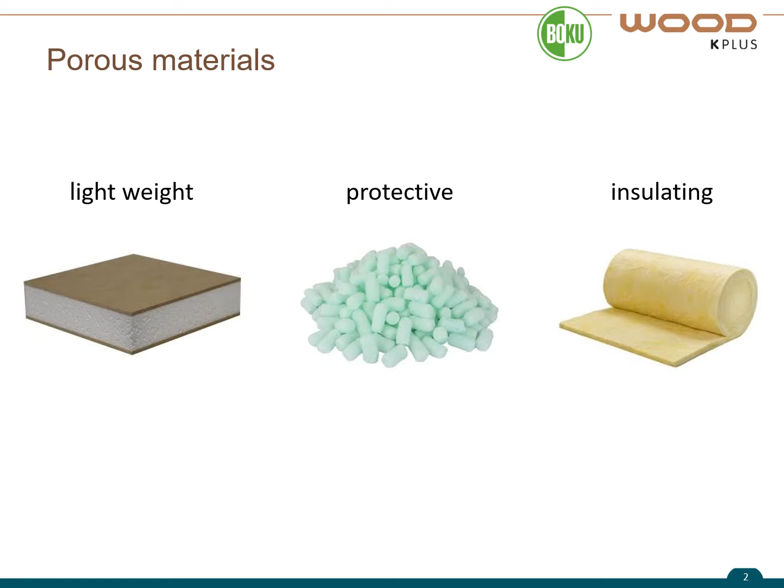Porous materials are widely used for different applications where different material criteria are needed. They perform as core layers, for example, in lightweight materials for mechanical purposes, but their lightweight is also of interest for packaging when it comes to protect valuable goods during transportation. However, not only their low weight, but also their low thermal conductivity is of significant value. That is why most insulating materials are of a porous structure.

Besides lightweight and thermal insulation properties, a good fire resistance and moisture resistance are of advantage. Inorganic materials, like for example different silicates formed to a porous structure, exhibit such preferred material properties, but their production is quite energy consuming. A bio-based hybrid that exhibits inorganic properties would be straightforward.

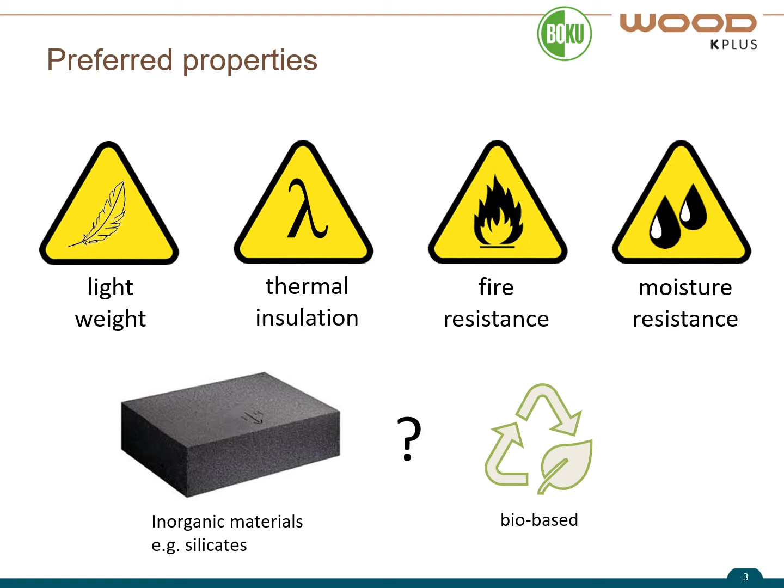As an interesting raw material, we defined wheat bran, which is a side product of the wheat production, arising in enormous amounts and appears in flake-like structure. Wheat bran is the outer shell of corn and is full of different nutrition that are mostly used for horse fodder nowadays. The second material that we were using for our investigation is wood sawdust, which is arising in enormous amounts in wood panel industry. Nowadays, most of this material is used for fuel and is burned.

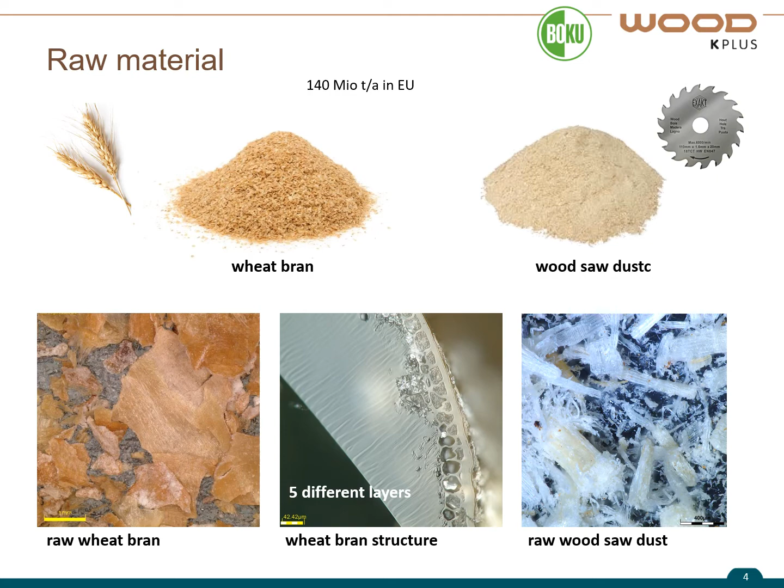As both raw materials are quite heterogeneous in their raw condition, we decided to use different disintegration techniques for homogenization. Therefore, we used a dry and a wet disintegration process in parallel. Here we used an ultra-centrifugal mill for the dry process and the ultra-fine friction grinder for the wet process.

After the disintegration, the aim was to produce a porous structure by means of mechanical foaming with a certain amount of organic and inorganic material. We started with different organic binder systems as for example PVAc, urea-formaldehyde and starch glue, but also different inorganic silicates in combination with surfactants like Tween and sodium lauryl sulfate to create foams.

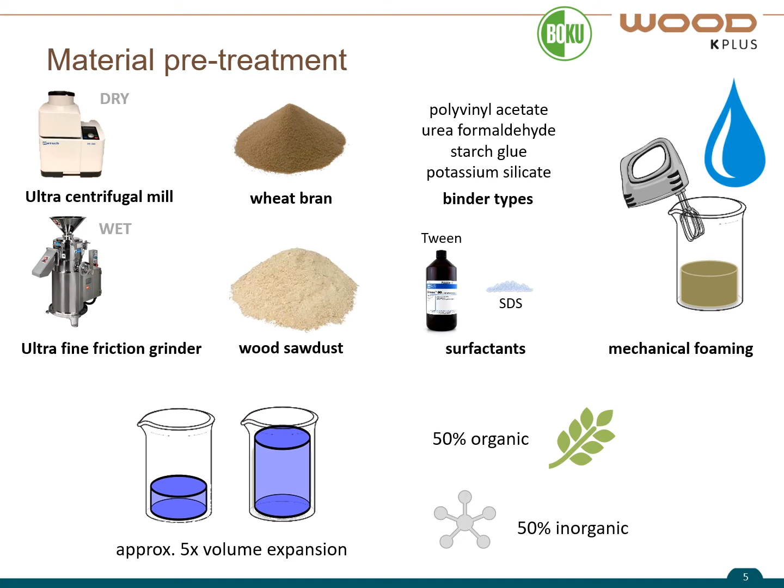In the beginning, we were not able to create stable foam with a significant amount of inorganic binder, as the moisture content of the organic material involved turned out to be crucial. However, in the end we achieved a 5 times volume expansion with 50% organic particles and 50% inorganic binder material and were able to dry the foam to a stable porous structure.

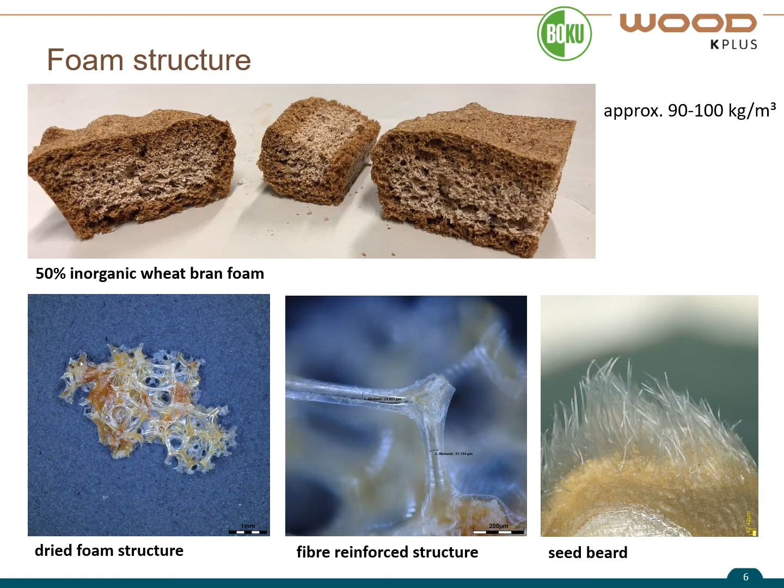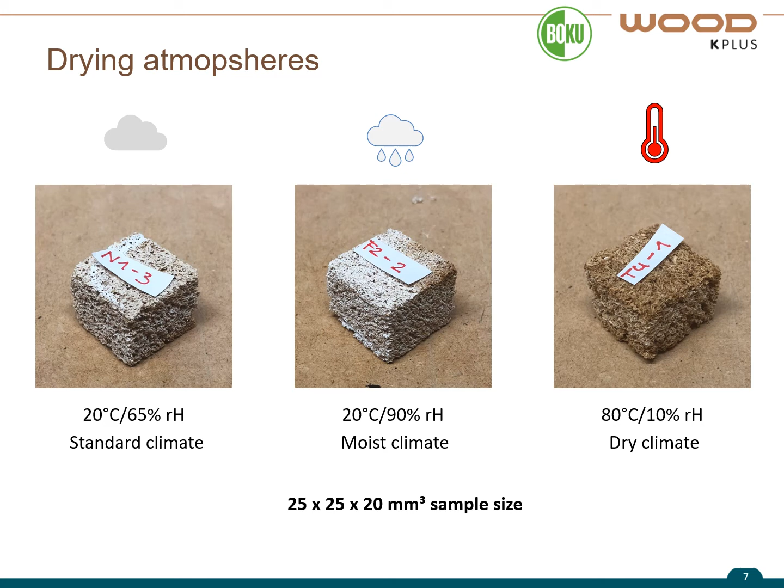As the wet foam contains up to 60% water, the drying is a crucial step. Therefore, 3 different drying atmospheres, namely a standard climate, a moist climate and a dry climate, were established to see their influence on the porous structure's properties. Finally, we were able to cut out samples for further investigation.

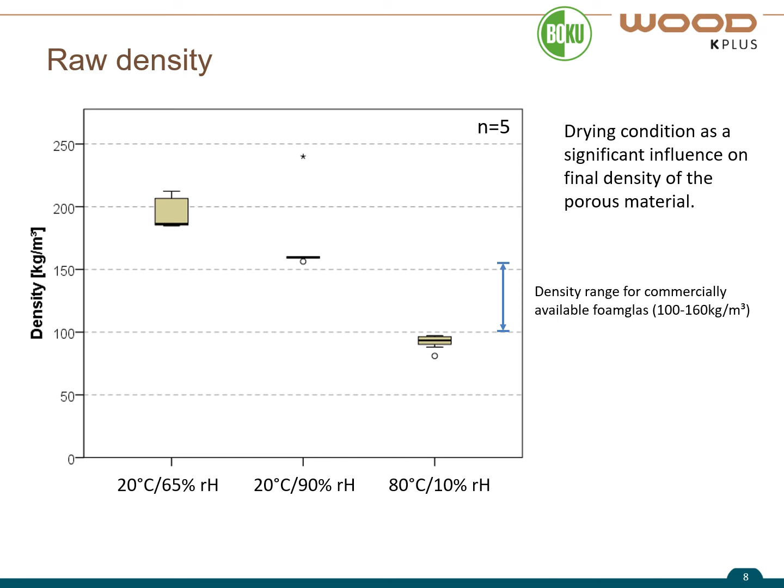On this slide you see the raw density we achieved with the different drying atmospheres. Interestingly, the high moisture content resulted in a slightly lower density than the standard climate on the left side. The lowest density was reached with the higher temperatures. On the right side you see an indicator for the density range for commercially available inorganic foam glass.

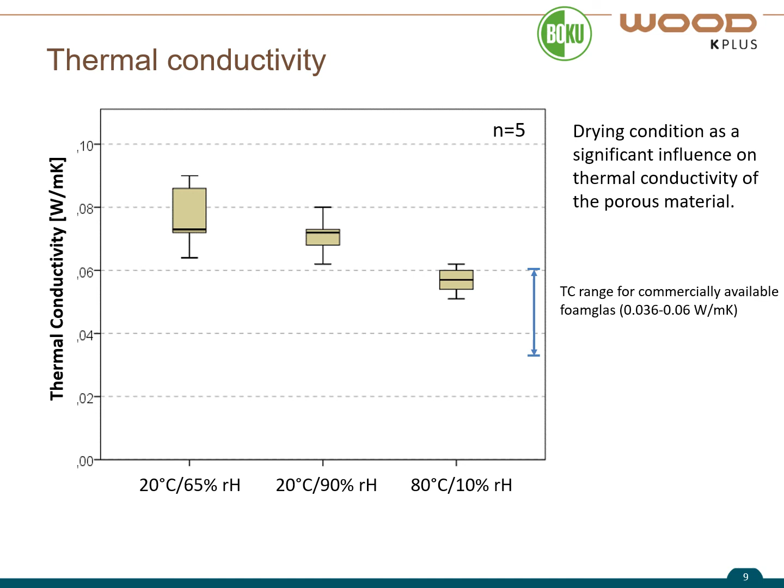On this slide we see the thermal conductivity values in watts per meter Kelvin of the samples dried at the different climates. Here, the 2 samples dried with lower temperatures show no significant differences with values around 0.07 watts per meter Kelvin. Only the higher drying temperature achieved a lower thermal conductivity of below 0.06 watts per meter Kelvin and is therefore within the range of commercially available foam glass.

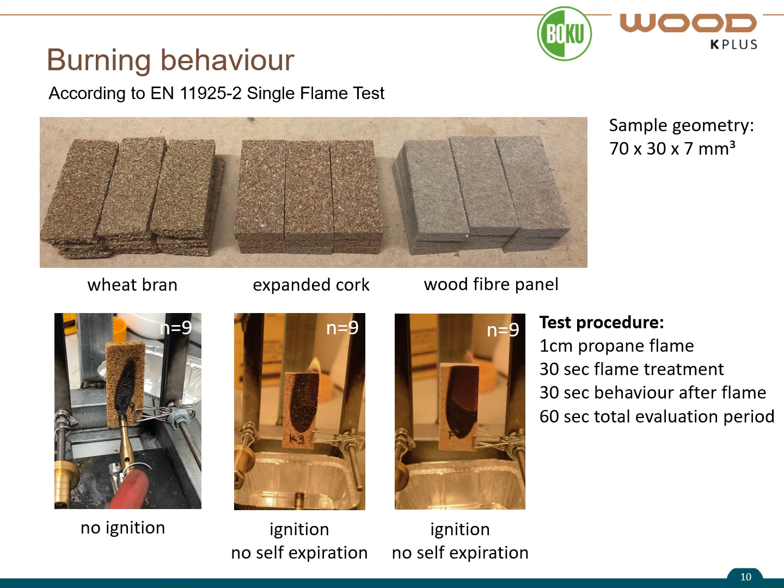Further, we conducted a single flame test where flame is held to the sample surface and the burning behavior is observed after the flame is removed. As reference material, we took cork and a wood fiber panel, both with a density of approximately 260 kg per cubic meter. What you can see is that our wheat bran sample did not burn after 30 seconds, where both of the other materials ignited and burned after the flame was removed.

To conclude, we can say that we successfully produced a porous material based on wheat bran, wood sawdust and inorganic silicates with quite low density, proper thermal conductivity properties and good burning resistance. In future we want to conduct mechanical tests to analyze the compression resistance of the material.